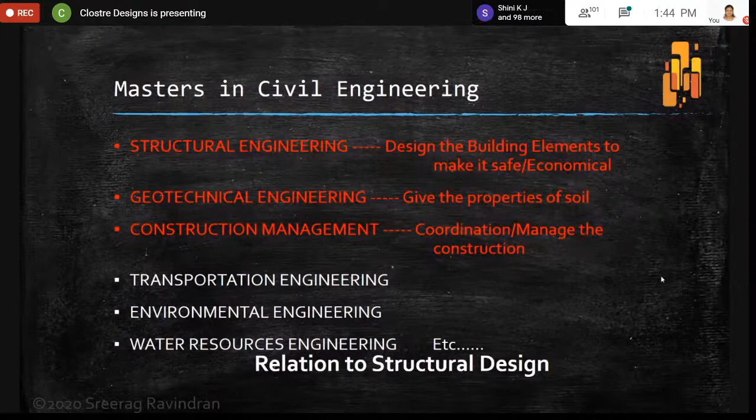Now I'll discuss a typical construction sequence. Firstly, a client will be there with a small requirement, maybe constructing a building or residence. 10 years before, this client used to go directly to the contractor and tell his requirements: I need a building like this, or I need a house like this. The contractor himself would make the plan, architectural plan, structural drawings, everything, and he alone would execute it at the site. This was the scenario happening, but now this has changed a little bit.

Now the scenario is changed like this. I think 50% is like this: client will directly go to consultants. Consultants include architect, MEP engineers, structural engineers, and many other engineers. Construction management teams will also be there.

So the client will tell his requirements to the architect. The architect will study what inputs he can get from the client and what the requirement is, then prepare a preliminary plan in order to satisfy the client's requirement.

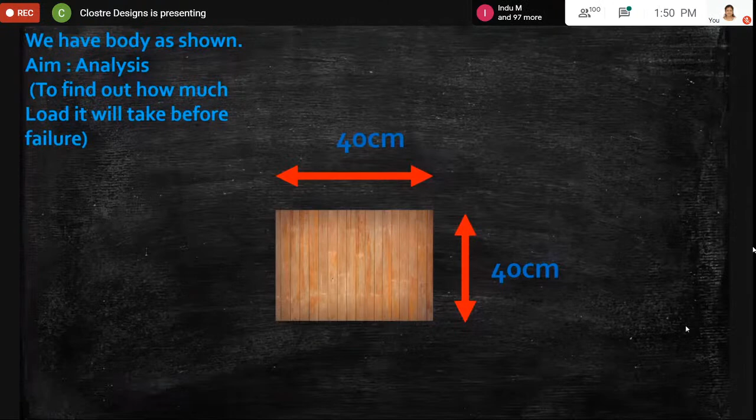Now we have a body with a width of 40 centimeters and depth of 40 centimeters. For the time being, I am not considering the length, as I'm just considering 2D for this explanation.

So we are giving the loading gradually—we will be loading all objects gradually only. We are increasing the load, and you can see at 5 kilonewton the body fails. That means the body has a capacity of taking 5 kilonewton load. So that is what analysis is: we find out how much load it can take without failure.

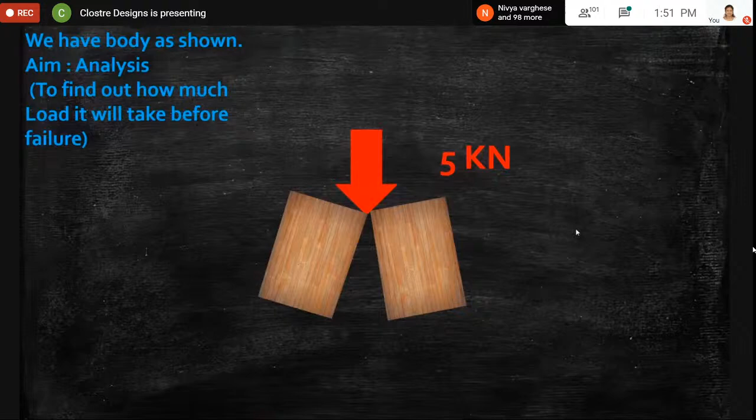So this body has a result of capacity of 5 kilonewton. Now we will discuss design. What is the difference between design and analysis?

We have a load of 10 kilonewton. Previously we had a body only, started loading, and found out how much load it could take. Now what we are doing is, we have a load of 10 kilonewton and we need to design a body to take the given load. We have certain calculations, and we found that, as per the calculation, a 40 by 80 body is suitable to take a 10 kilonewton load.

Now what will happen? We'll try giving the loading. See, we started increasing the load. Now it is safe. So we gave a load up to 10 kilonewton and we saw that the body is safe and stable. That means it was designed to take 10 kilonewton. It is not breaking at 10 kilonewton, right?

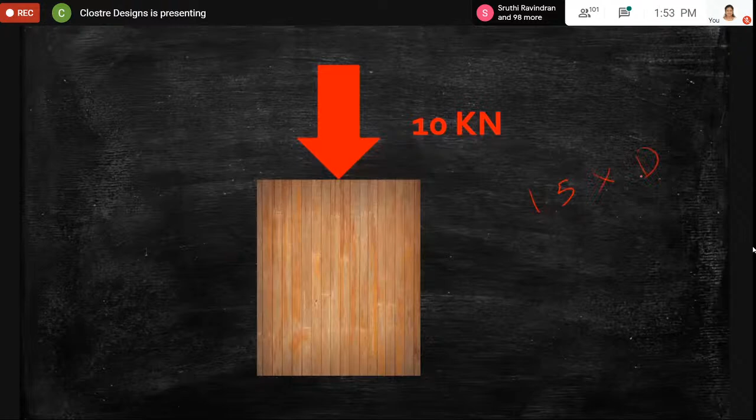Because we will be having a factor of safety, maybe 1.5 into load, or maybe it depends upon the codes, we will be having a factor of safety.

Now, further, we are increasing the load. So we increase the load and found out that at 12 kilonewton, the body breaks. That means the body can only take 10 kilonewton safely. That is what we can understand from this experiment. So the body was designed for 10 kilonewton, but still it broke at 12 kilonewton. That means there was a factor of safety, that is 12 divided by 10. So that was the factor of safety considered by the designer.

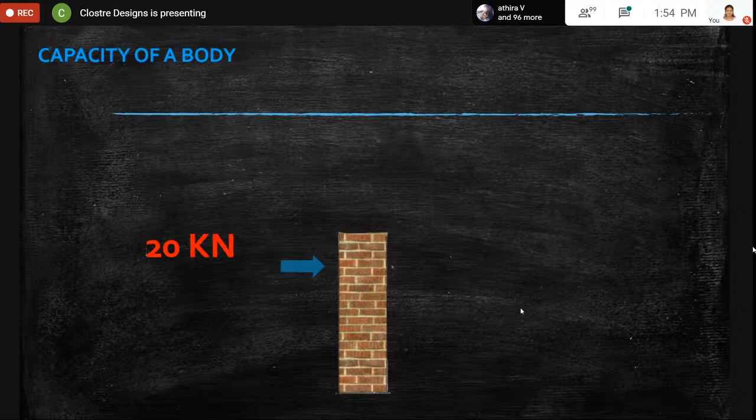Now, again, I have a wall here. This wall, I started loading gradually. So when it reaches a certain limit, it should break, right? So at 20 kilonewton, the wall collapsed. Wall failed. That means the ultimate capacity of the wall was 20 kilonewton. Beyond that, it will not take.

Now, what is this capacity and the action and all? See, whenever we are having a force or action, there will be a reaction. When we are giving a force like this, we will get back a force like this. If we are not getting back an equal and opposite reaction, the body will fail. That is the failure.

Now, when we are giving a load like this, we will be getting back a load like this. So gradually, what happens is, when we increase the load, this load also will increase. So when it reaches a point where this is not increasing accordingly, the body will break. This is known as, actually this is just Newton's third law. For every action there is an equal and opposite reaction.

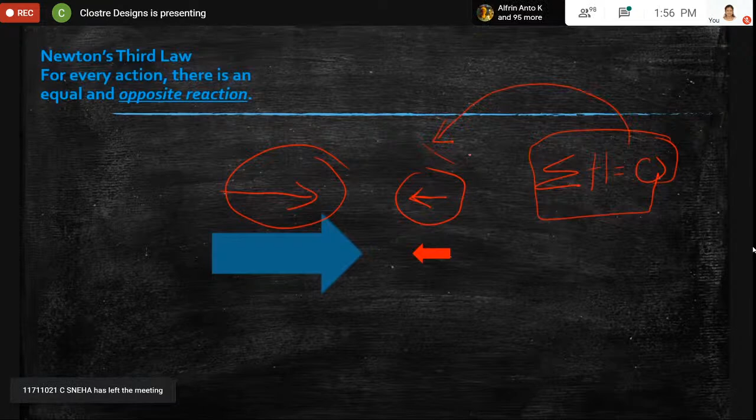So that is known as equilibrium. Now, if on the left side we have a loading and it is increasing, but we are not getting an equal and opposite reaction, that means it is not in equilibrium. So this is less and this is more. We have already studied sigma h equal to 0 as our equilibrium equation. So this equation is not applicable here. See, actually it is not 0. So we are getting an external force, but this is not in equilibrium.

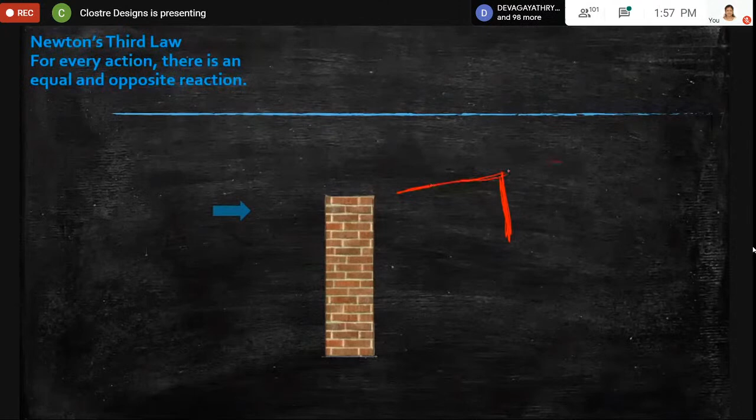So this is what we are doing as a structural engineer, to balance a force. We will be having many complicated buildings, having maybe one column and one cantilever without a counter. So maybe we need to add additional load upon that to overcome the load here, to make it in equilibrium. This is a simple thing, but this is what we are using in the design. Any software or anything, the same is used.

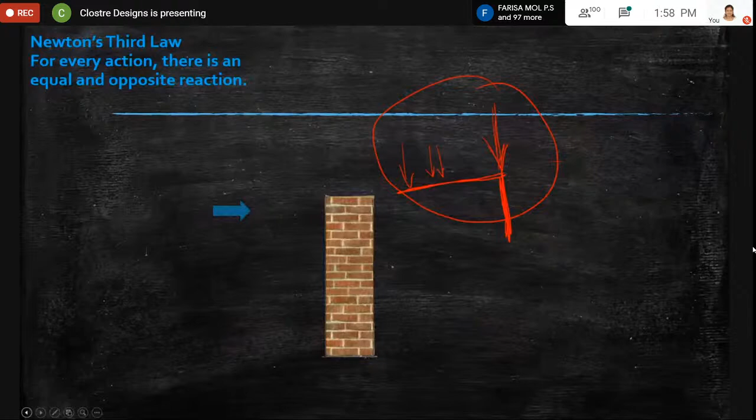Now, see, for the same example, while we give 10 kilonewton, we are getting back 10. See, when we are giving 30, we are getting 30. So it happens that, actually this will not be seen by us, but this is an internal reaction which the wall gives back while we apply a force.

But when it reaches the capacity of the wall, actually we found out the capacity was 100 kilonewton. We already found out in the previous demonstration. So when it reaches 100 kilonewton, further the wall cannot give a reaction back. So this becomes 110 and this remains 100. That is why the failure occurs. This is the simple thing which you must understand in order to design a building. Not only building, even in any branch, mechanical also, when we are designing machines, the same thing will be considered.

This was the failure reason. We had a load of 110 kilonewton, and that is greater than 100 kilonewton, so it failed. This is the same scenario, but this is not actually in equilibrium.

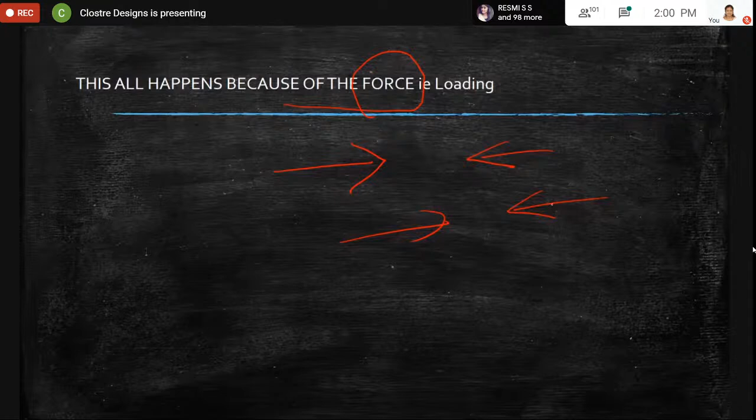Now, this all happens because force is there, right? Whenever we are getting a force, we will be getting a reaction. So there is an action and a reaction.

Force means what? Usually in buildings, force means loading. Let's simply consider one beam. One person is standing here, so the body weight of this person will be acting on the beam. This is the force and this is the loading.

Now we'll discuss all the types of forces and loading. See, we have a body here. This is an unloaded body, having no external force. If there is no external force, there will not be a reaction.

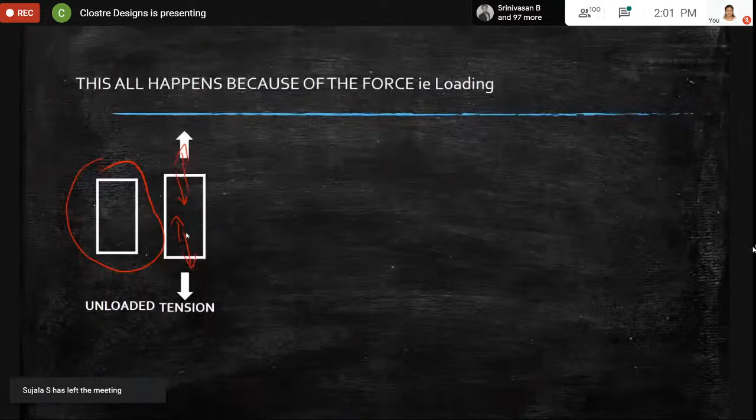Now another body, we are applying a tension on it. While we apply tension, the body will have a compression inside. That is why, in order to make it in equilibrium, an opposite reaction will be there. So in this scenario, this is tension force.

Whenever we are stretching something, that is known as tension. The terms I am using are very important in design. Now, what is compression? Compression means whenever we are compressing a material or an object. These two terms are very important: tension and compression.

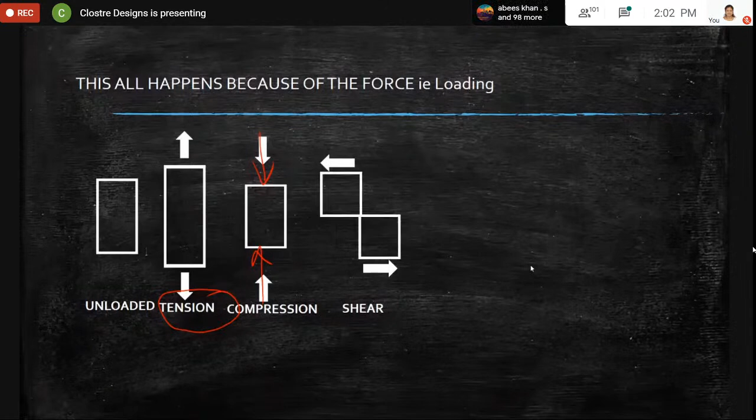Now about shear. Shear means, as you can see in this graphic, sliding - this is shear. I'll explain this once more with another video. Now this is bending. Bending means whenever a body is bending, like this.

Now, what is torsion? This is actually when one force is acting like this and another is acting like this. So this will create a torsion effect in the body.

Now, why do we study this much loading? See, when we get a tension load, what must we do? After getting a tension load, we must design a body to take this much tension load. If we are getting a 10 kilonewton tension, we must design the body to take maybe 10 into 1.5, that is factor of safety.

So we will design the body accordingly, and that body will take that tension. Now, what about compression? Same thing - if we have a 10 kilonewton compression, we multiply by factor of safety and design that load to get a material or object to withstand that compression. Same for shear, bending, and torsion.

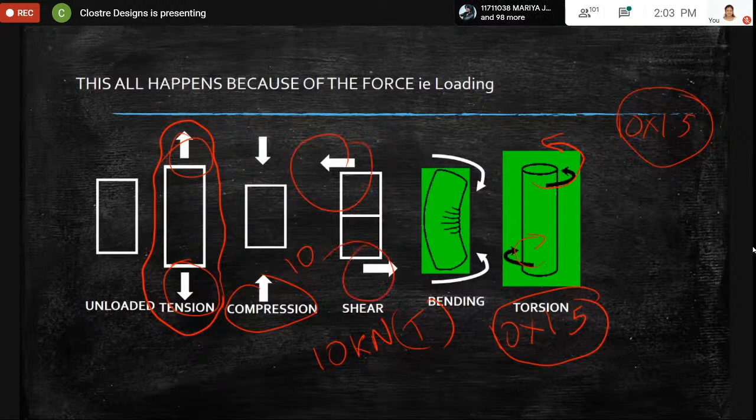Now, it is difficult to get a body with only tension force. There are such bodies, but still it's very difficult - it was very rare to get a body with only tension or only compression. There will be a combined effect - tension, compression, shear, bending, torsion will all be there. So actually all these loads together will be affecting the body.

This will be a combined effect, so we need to design for this combined effect. That body must be designed for tension, compression, shear, bending, torsion, etc. Whatever loading it is having, we need to design for that.

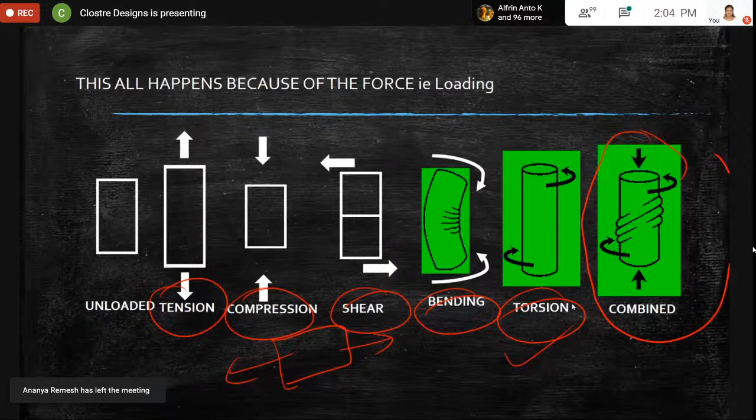That is why for a beam design, maybe you will be doing beam designs in third year or fourth year. While doing any column design, beam design, or retaining wall design, we will be checking for each case - shear, compression, tension, torsion, like that. So this is the scenario and this is the basics of design.

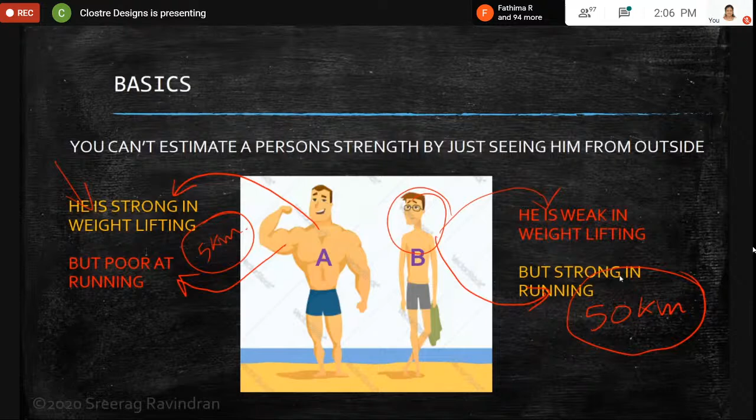without resting. So what we must understand is we must relate this to our structural design. Here we can understand that all bodies will be different and unique, all materials will be different and unique. So some bodies will take some type of loading more, and some type of loading less.

As we already discussed, we have tension, compression, shear, torsion, etc. So for these loadings, A can take only compression, or B can only take tension - that can happen. Every material or object is not the same. That is what I wanted to tell you, and now let's see how it relates to our structural engineering.

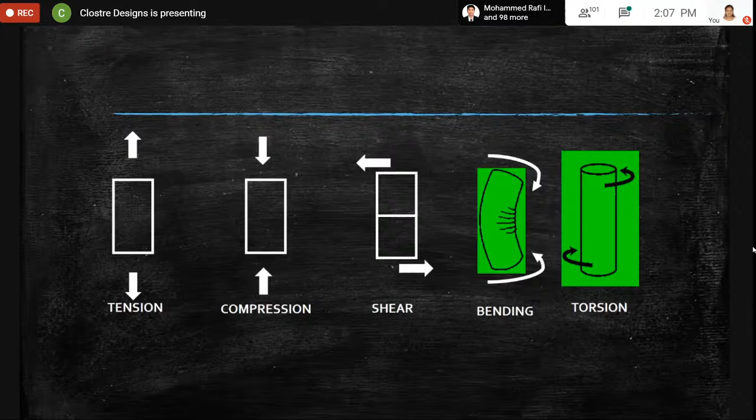See, we already discussed, we have tension, compression, shear, bending, torsion. So some bodies will be taking tension more. It can take maybe up to 100 kilonewton tension. But same 100 kilonewton, if you give compression, it will fail.

So the same body will be taking shear more and not bending, and it may be taking torsion more. So this purely depends upon the material. Now I will show you one example of this type of loading so you will understand more. Some materials are there, maybe it will take a less amount of tension and high amount of compression and all. I will discuss with you later in a later slide.

See, some objects will take all the loads. Now these two forces are most important for you: tension and compression. What is tension and compression? This diagram should be in your mind when you study or do analysis. Tension and compression.

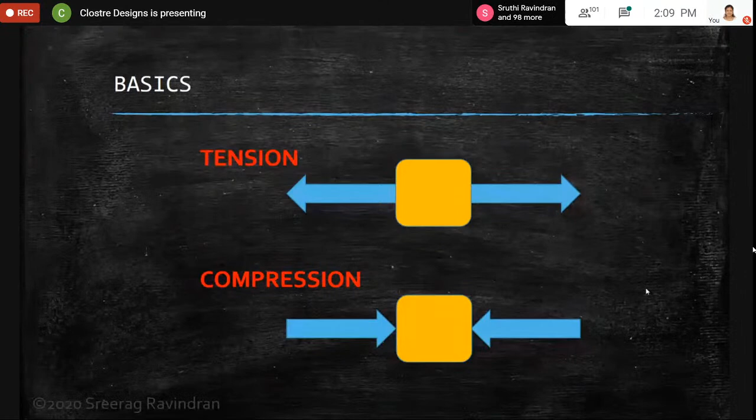See, in olden days, you can see mud houses. Before 20 years, mud houses were very common. 20-30 years ago. Now it was replaced, and now it is obsolete. So previously, this mud structure was there, right?

Mud is a material, but mud has some problems, some weakness. Mud will take compression more. If I have a mud block and I give compression, it will take it. But if I give tension, mud will break.

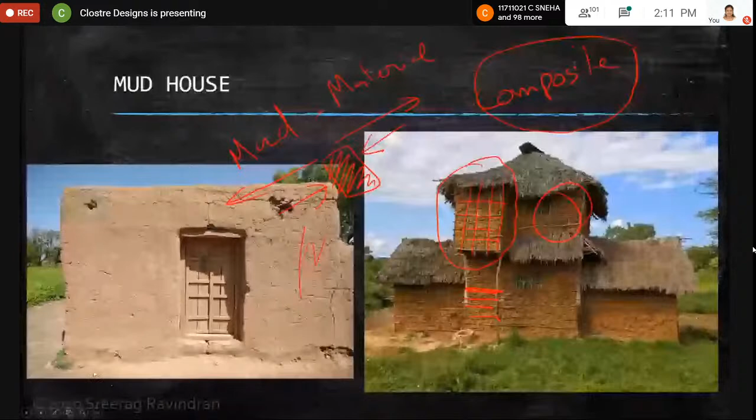Now, see, I told you mud is weak in tension. You will be thinking why it is weak in tension. You may not have observed. See, if we have a mud block like this, you can see if we stand here, what will happen? This will break, right? This will be happening like this. That is why landsliding occurs. Nowadays you are familiar with landsliding because for the last 2-3 years we are hearing about this landsliding. Why? Because, see, you see this one.

You can see this one. When there is tension, this is a tension force. When we are having a tension force, the mud fails. That is why we are getting that mud is breaking. I hope you understood this. So this is the scenario in the mud. So I think now you understood why mud is weak in tension.

See, whenever you are seeing some object, you can observe that object and analyze it in your mind. So that will be clear for you. That is why we use a combined form, that is bamboo plus mud. Some people may ask, why can't you use bamboo only? You can, no issues, but some other problems will be there, acoustic problems and all. So that must be covered along with the soil.

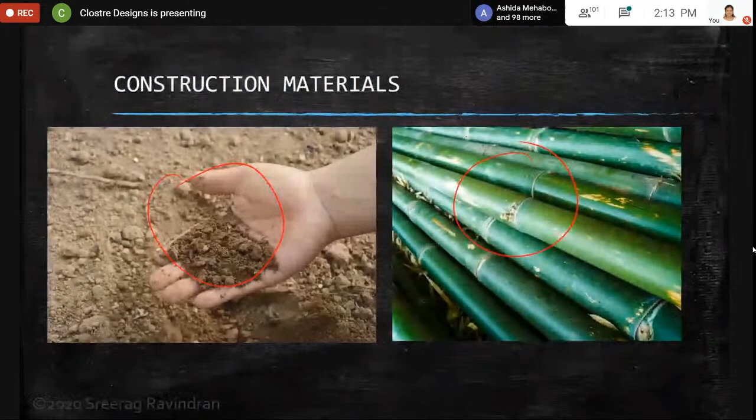Now, why is this related to our construction industry? See, construction materials previously were mud and bamboo. This was the major construction material used before 20 years. Now, as I already discussed, mud will take compression more, bamboo will take tension more. See, now it is replaced.

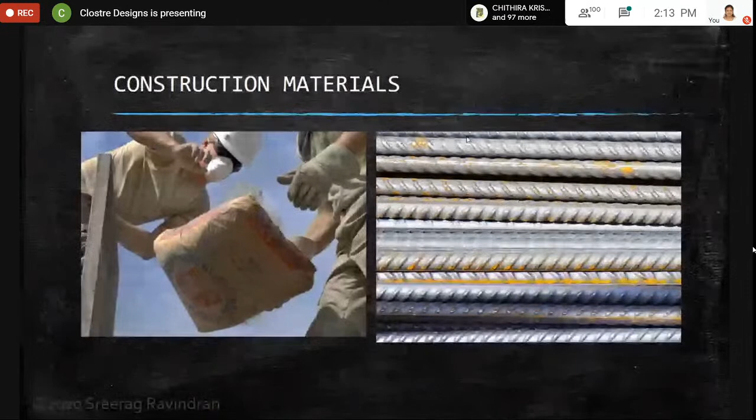Now mud is replaced with concrete, RCC, and steel - our bamboo is replaced with steel rebars. So this compression and tension works the same. For concrete, you all know it will take more compression, and steel, it will take more tension.

Everybody will be having a confusion. Whenever we say concrete is good at compression and steel is good at tension, that means concrete is weak in tension, right? Concrete cannot take that much tension. We are neglecting the tension force, which can be tension capacity. While you are designing, you will be checking this tension, but you will neglect it.

But steel will take tension more, and people will answer compression it will take less. No, steel will take both loads. That is why you can see steel structures, buildings only with steel, I-section, I-beams and all. But you can't see a building only with concrete without reinforcement, because tension will be difficult to attain.

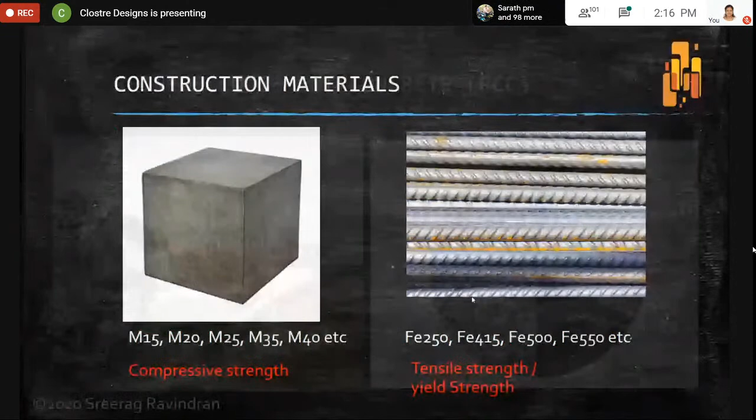Now what is RCC? Don't mistake, it is not reinforced concrete cement, it is reinforced cement concrete. What is RCC? It is a mixture. Coarse aggregate will be the important mixture, more in this mix. And again we will be adding fine aggregate, then cement, then water, then if needed only, admixtures.

So while going to site, you may see people telling what type of mix, okay M20. M20 means 1:1.5:3. So what this means? 1 means cement, 1.5 means fine aggregate, and 3 means coarse aggregate. This is the ratio, and this purely depends upon the design mix.

So we have actually site mix also will be there. Maybe the aggregates available in different sites will be different. So the best practice is, whenever you are doing construction, just make a cube having IS specification 150x150x150 and break it at 28 days and confirm the loading, that is M20 or M25, whatever is mentioned in the structural drawings. If you are going for a QC engineer and all, you must know this type of things.

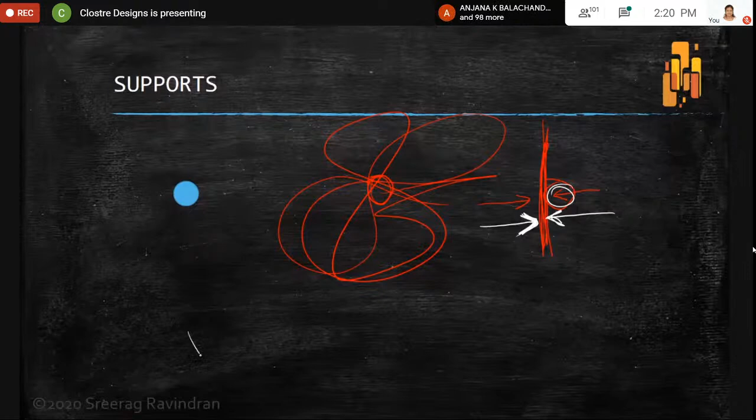I'll show you in a different color, that will be fine. Whenever we are getting a force like this, that means the body will try to move, right? So we will be getting back a reaction. So wherever we are restricting, this point must be very clear for you: wherever we are restricting, reaction will be there. Action and reaction will be there. If there is no restriction, no reaction will be there.

For this particular body, no reactions are there because it is free to move. Nobody is forcing it to stop. It is free. I am ignoring friction for the time being.

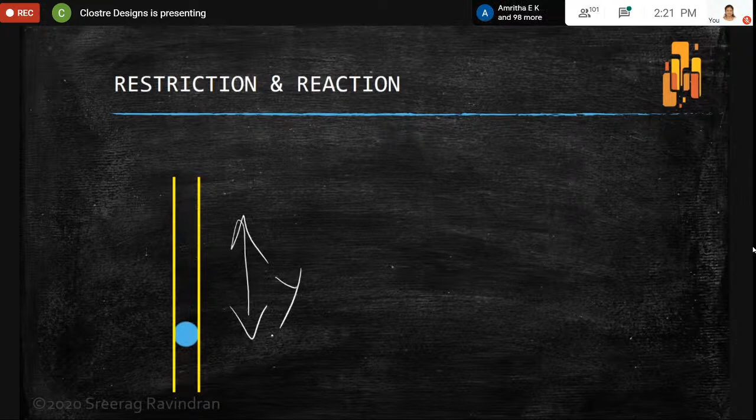Now the same body I am taking in one tube. What happens? It can move only in the Y direction, right? So in this one, it can only move in the Y direction. So where will the reaction be? Which direction will the reaction be? Obviously it will be here, right? Because the body will try to go outside, but the wall is giving like this, and the body will try to go outside, and gives like this. So we are getting a reaction like this. The direction of the reaction is very, very important.

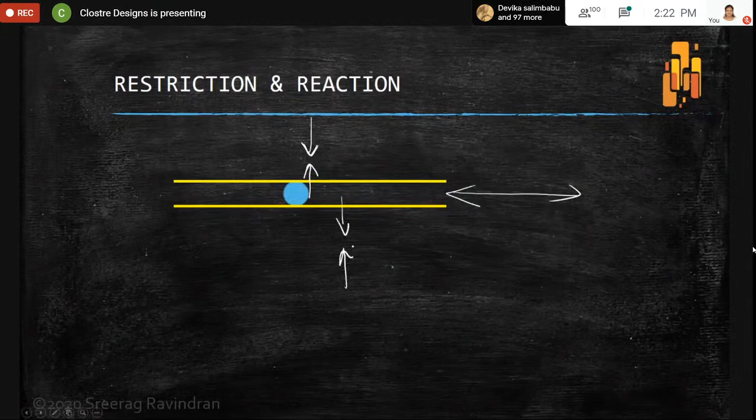So another body, we are having an X direction movement. Where will be the reaction? Which direction will be the reaction? This direction, nobody is restricting, so no reaction will be there. But when the body tries to go outside, the wall will push like this, so that is a reaction. And again, here also, one reaction will be there. So graphically we can show like this. So this is what reaction is.

Now, what happens when a body is in a box? It can't move anywhere, right? So we will be getting reaction all around. The body will try to move, but this will be fixed.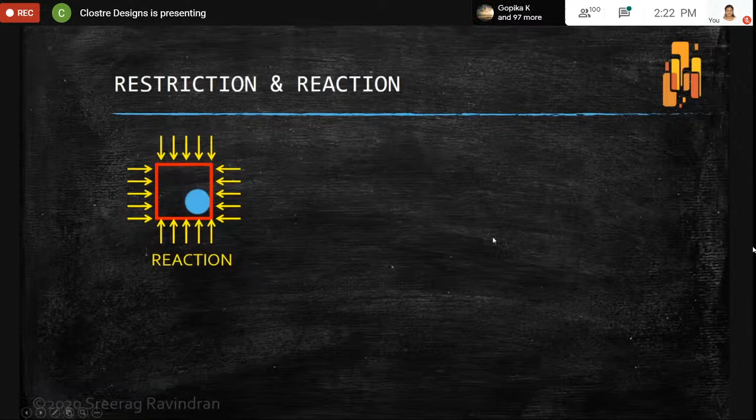Now, same thing, I am just considering a ball or something like this. Now, this one can move in what all directions? It can rotate clockwise and anti-clockwise. And it can move in X direction, and it can move in Y direction. So this is the three possible movements in an XY plane. I am not considering 3D for the time being because it may lead to confusion, so for the time being I am taking 2D. So we have X, Y, and rotation. These are the three movements or free movements of a body.

Now we will discuss what is roller support. I am covering your topics one by one, roller support also. While you are studying, you will find it is actually familiar. This roller support is familiar. What is roller support? I am considering three rollers here.

What happens? We will see by giving a load. When I am giving an X direction load or force, anything, it will move, right? Nobody is restricting the movement, it is free to move. So that means we are not getting a reaction in this direction. It is free to move. Now, X direction is allowed.

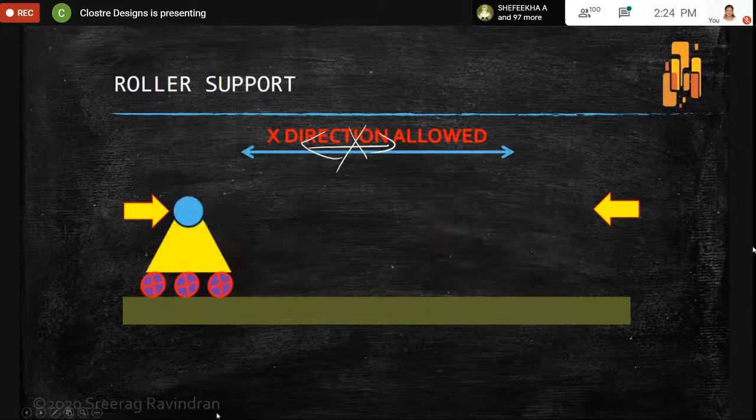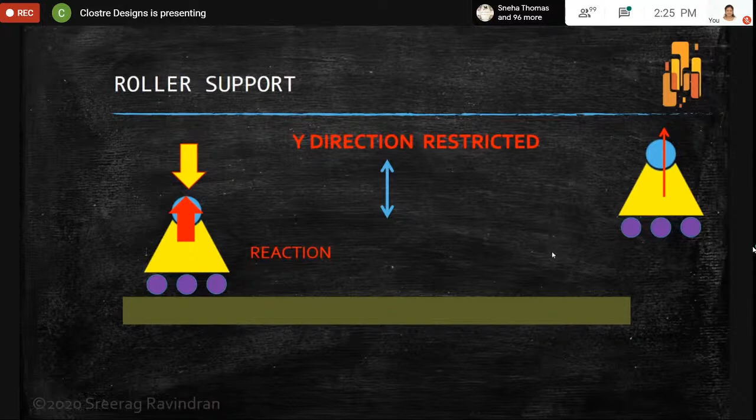What about Y direction? When we have a Y direction force, the body can't go outside because it is restricted. One wall is there, right? So we will be having a reaction. So as we previously shown, X direction is okay, fine, Y direction is not possible, reactions are there. Now, Y direction restricted. So this is it, and what about rotation? Rotation is possible, it can rotate like this. So rotation also possible, so only restricted thing was Y direction.

So we will be getting a reaction on the Y direction, rotation allowed. See, what is the example for this roller support? Have you ever thought about that? Whenever you are studying something, you must consider or check the examples, whenever you are seeing something you must give an example with your familiar cases. See, for this one, have you seen a bus?

This bus can be an example for roller support, right? When I am giving a force like this, whether the bus will go down - if the soil is bad, the bus will go down, I am sure. But if it is on a road, a hard surface road, it will not go down. But if we push like this, and if it is in neutral, only then it will move, right? It must be in neutral and without a brake, then it will move. That means it is an example for roller support, right? So that is a common example which you can see everywhere for the roller support.

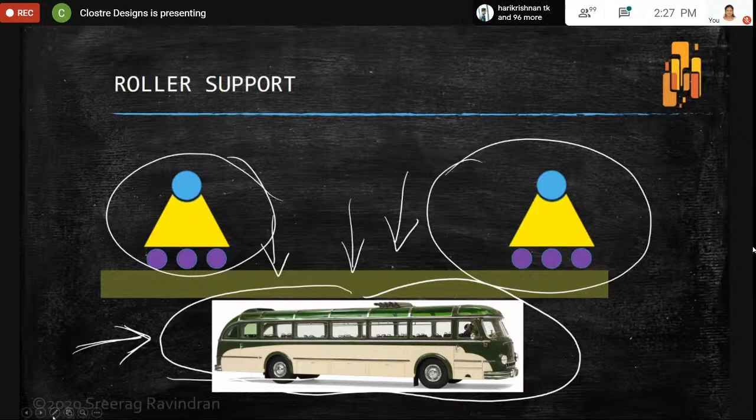Now, see, we need to check what example is there in our structural department, right? Structural engineering - have you ever seen any example for this one in any case? Yes sir, where? In the case of bridges. Very good, very good, very good. See, in case of bridges, roller supports are there.

You can see the image here. Roller supports are commonly located at one end. Please be noted, it will be in one end only. This allows the bridge structure to expand and contract with temperature changes. The expansion forces could fracture the support at the bank if the bridge is locked. See, some small movements will be there, some delta - if you are studying structural engineering, it will be familiar, delta. So some small deformation, some small deflection will be there. That deformation is allowed, maybe it's small, maybe 10 mm or 15 mm. That is allowed. If that is not allowed, or we restricted that, it will cause problems for the bridge.

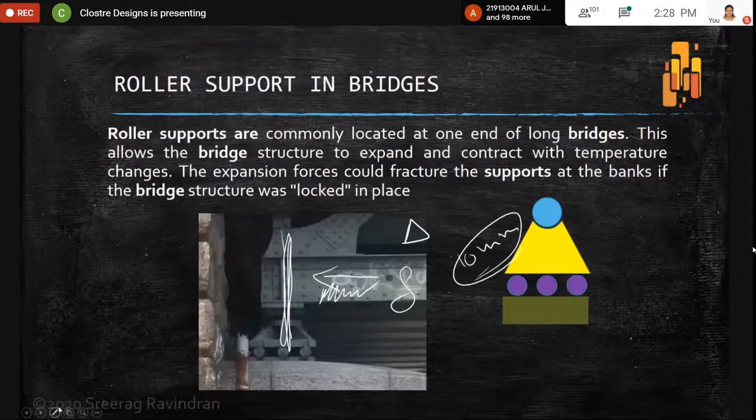It will cause cracking. That is why we used to give roller support in one end. Now, after this session, check your old mechanics textbook. Anywhere you check, you can see this type of problem.

One place it is hinged support and one place it is roller support. While I was studying, I was confused why everywhere it is like this, and teachers are not discussing this, because in first year we are not aware of this much. That is why they are not discussing it. Anywhere in the mechanics textbook you can't see a beam like this, because if it is like this, it is difficult to solve. So you will be seeing like this.

Whenever you are finding out a bending moment for a simply supported beam, the beam will have a roller support in one end. That is the condition. Now what about pinned support? I think roller support is clear for everybody. Pinned support is very simple. We are just avoiding the rollers and resting the pinned support on the beam. Now can we do a similar experiment?

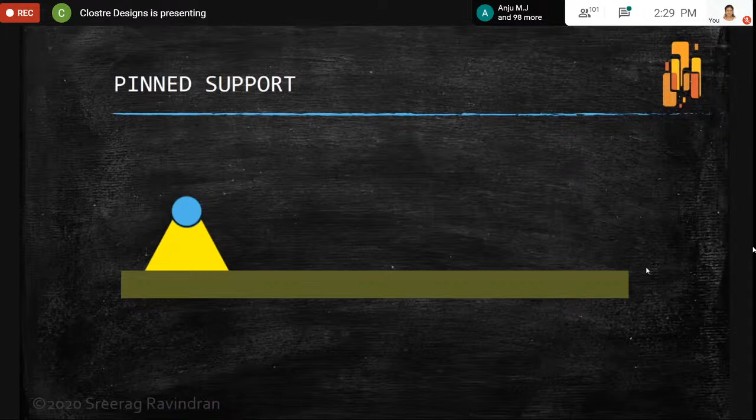We are giving a load in the X direction. Can it move? No, sir. So whether reaction is there or not? Reaction will be there, sir. Why? Because it is restricted. So reaction will be there.

Previously in the roller support, we were not having restriction in the X direction, so we were not getting a reaction. Now the scenario is different. That is the main difference between roller support and pinned support. That is very simple now.

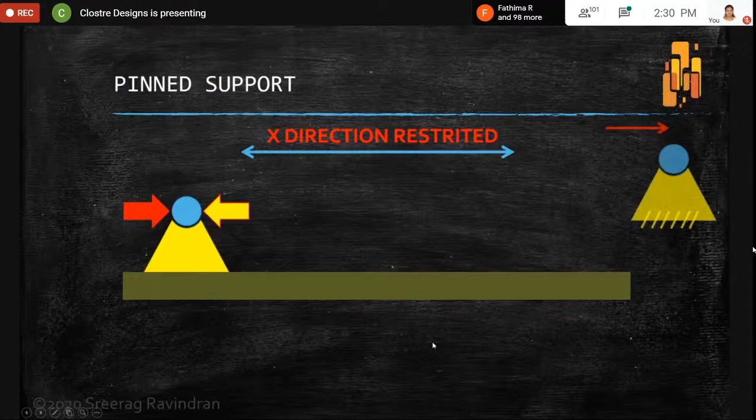So there is a reaction. X direction is restricted, so this is the pinned support. What about Y? Will we be getting a reaction? Reaction will be there. Previously for a roller support also, the same reaction was there. This is what you studied in mechanics, and if you go through it after my session it will be more clear, I hope.

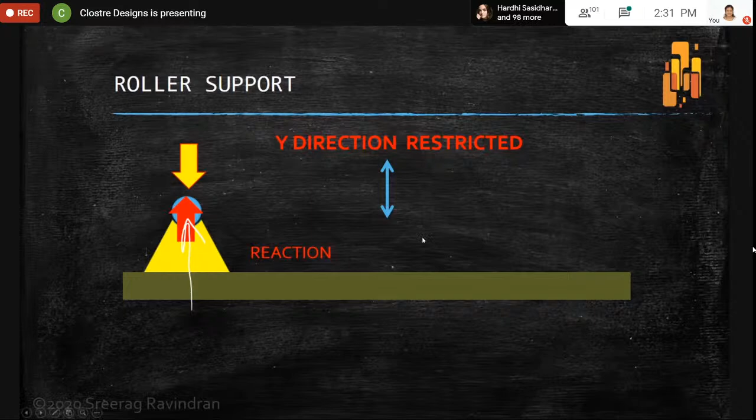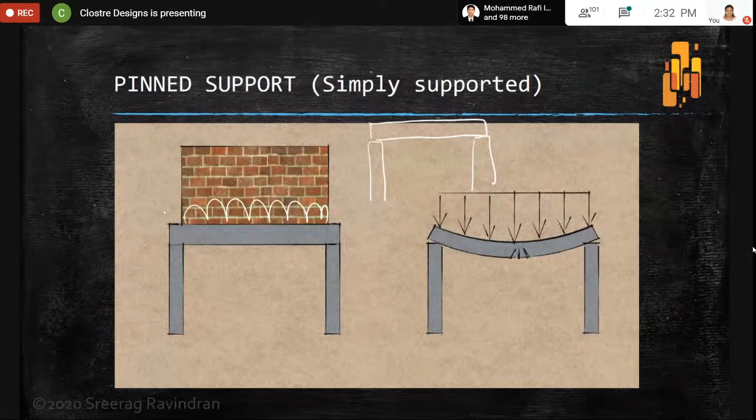Now what is a pinned support in the original case? Whenever we have a beam and we place one beam simply like this, that is why it is known as simply supported. Simply we are placing it. So we are having a load and the beam will deflect like this. You can see here, and cracks are formed here. Here you can see a small delta. So this is what happens in a simply supported beam.

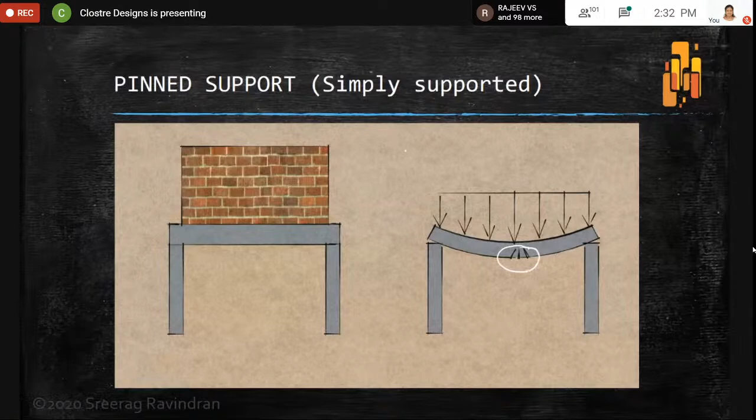Now one more thing I need to explain. Why are cracks here? Whenever we take concrete, that is RCC, reinforced cement concrete, we add steel together. We already discussed that in the first 2-3 slides. We add steel together with RCC, not plain cement concrete, so we get a composite material. If you take a beam cross section, we will get a reinforcement like this.

As per IS code, yes, you are correct. As per IS code, minimum 2 bars must be provided at the top also, no issues. Now why are we providing here? Because if we consider a beam, we will be having a neutral axis. We have compression and tension, that is the main thing. Tension will be here and compression will be somewhere here. It purely depends upon the loading.

If I am getting a loading here, it will be different, so don't memorize it, just consider as per your case. So this tension and compression - wherever compression is there, we need concrete, and wherever tension is there, we need steel. In the tension face, concrete will have a small crack. For sure cracking will be there. That is known as cracked concrete. You may be hearing the term cracked concrete.

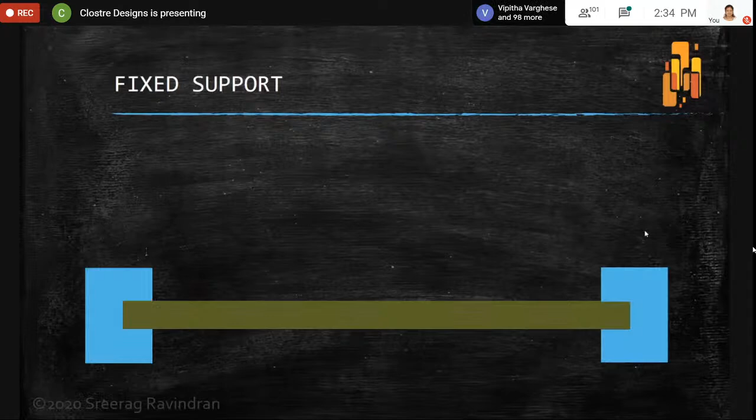What is fixed support? Fixed support means whenever we have a beam like this and we are just fixing it, nothing is allowed. No horizontal movements, no vertical movements, no rotation, nothing is allowed. That type of support is known as fixed support.

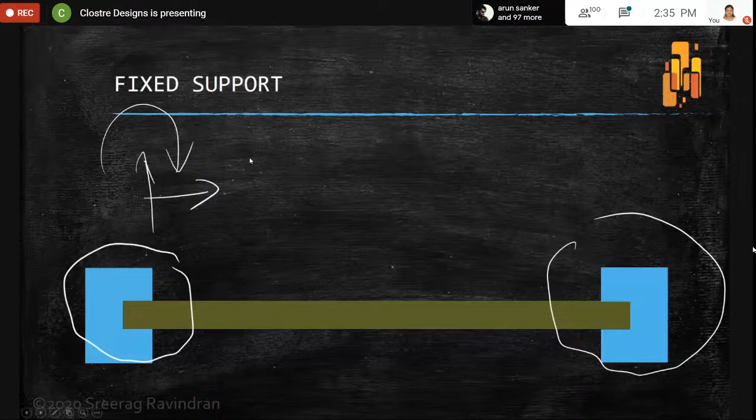These are the three main supports in structural engineering. If you know these supports, it will be very helpful for your preparation for GATE or design, and it will help you solve complicated problems. So these are the indications.

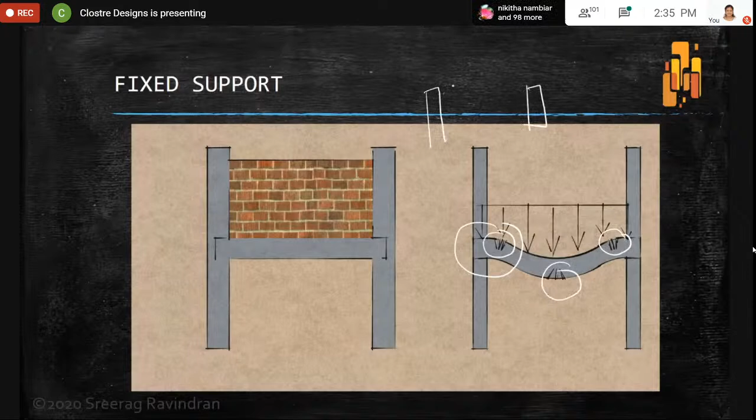You can see the difference between our simply supported and this one. See, cracks are here too, right? Previously, the crack was not here. Previously, if we had a beam, our beam was like this, this gap was there. But here, no gap is there.

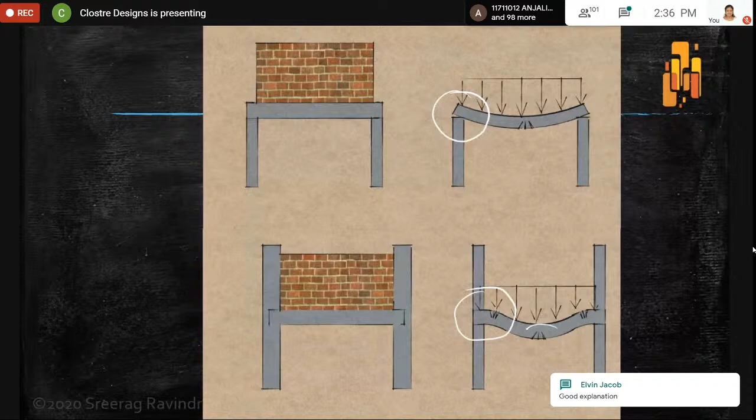So this is what a fixed support is like. See the difference. This is very important for you. Just see wherever I circled, the crack formation. And what is this one, a fixed support or simply supported? Anybody?

Top side, what is this one? Simply supported, sir. Very good, simply supported. And what about this one? Hinged support, huh? What about this one? Second one is fixed support. Very good, very good, okay fine.

Now we covered most of the basic things. Now we are going to the elements of structural design, elements of structural engineering. While discussing the master's degree in structural engineering, we said this deals with the design of structural elements considering safety and economical feasibility.

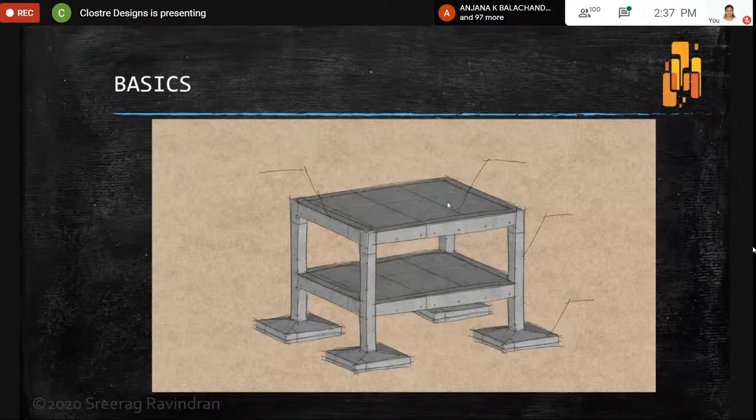Correct? So this one is slab. What are the elements? These are the basic elements of structural design: slab, and what about this one, column, and what about this one, foundation. This one is beam. Some other things will be there too, like retaining wall, but still for this type of building, these four are the elements considered.

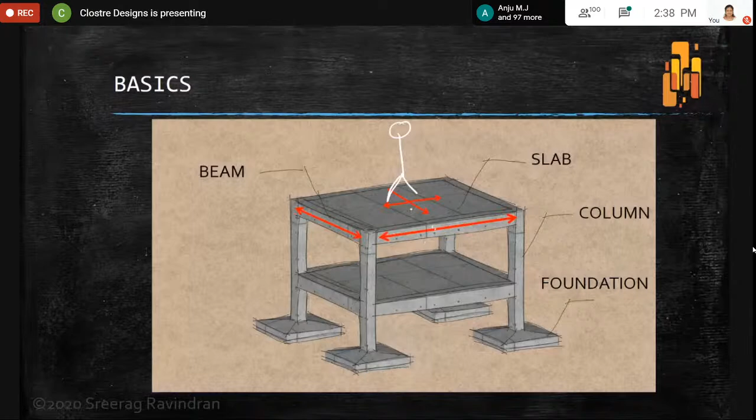Now, how does the loading occur? When one person is sitting or standing there, his load will be transferred from the slab to the beam, from the slab to the beam. And then what happens? From the beam it will go to the columns, correct? Then from the column it will go to the foundation. Then from the foundation it will go to the soil, and again soil will give back a reaction, right?

That is what we studied this much. When we are giving an action, there will be a reaction. See, this portion, soil will be giving back a reaction, and if this reaction is lesser than action, there will be a settlement and a foundation collapse. So these things about the soil, geotechnical engineers will give us a proper idea or report. I can show you some report which mentions the N value, that is SBC values for the particular site.

Now, what is shear? The best example for shear is this one, scissors, while cutting the paper. It is exceeding the shear capacity, that is why it is tearing. You can see the beam also here, the beam shear also you can see here.

Now you can see in the first one, shear failure has happened for that particular beam. First one, shear failure was there. If you are doing MTech or PhD or something, you might be observing this one. This is shear failure.

And what is bending? If we have a rubber object, see, this is bending. You can bend the object like this. And for this particular object, it is not okay with the bending. It is bending too much when we are bending it.

In this demonstration, I just want to show you how the beam bends like this.

And we discussed torsion also, right? What is torsion? See, this is torsion. You can see it in this video. So this is what torsion is.

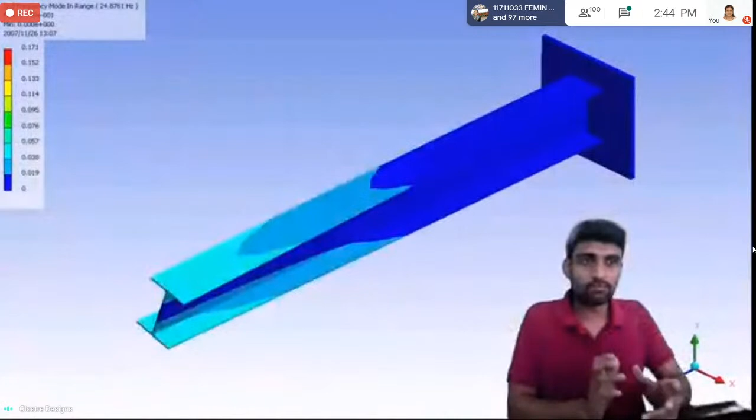And while we design an object for torsion load, we used to design it for that. And our deflection or stress, whenever we are having a load, we will be having a stress. This is a stress deformation, the stress formation in the beam for torsion.

Previously I was telling you that some objects will be having a capacity to take only tension or only compression. See, I have a thread with me, and I am just trying to pull it. So pulling means tension, right? Just remembering this one, this is compression and this is tension.

So this must be clear for you, which is compression and which is tension. Now, in this particular string or thread, when I am pulling, it is taking load. But while I am compressing, it is not at all taking the load.

So this object, see, shear also it is taking somewhat. But it is not taking tension... it is not taking compression. It is good at tension. So some materials have properties like that.

Now, in this demonstration, I'll show you one thing. While we are bending the beam, I told you that we will get a compression zone and a tension zone. See, this beam has lines upon it. Observe the lines please, you can see here the lines have stressed too much, right?

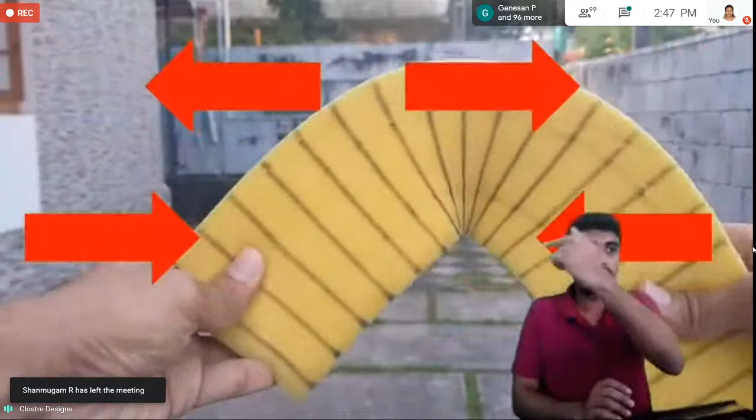Okay, now we may have a cantilever, right? Sometimes we may get a cantilever. Maybe bending will be in the opposite direction, meaning the same thing, it will be ulta, that is, compression will be down and tension will be up. So the basic principle is wherever we are getting tension, we must provide steel reinforcement because concrete is weak in tension.

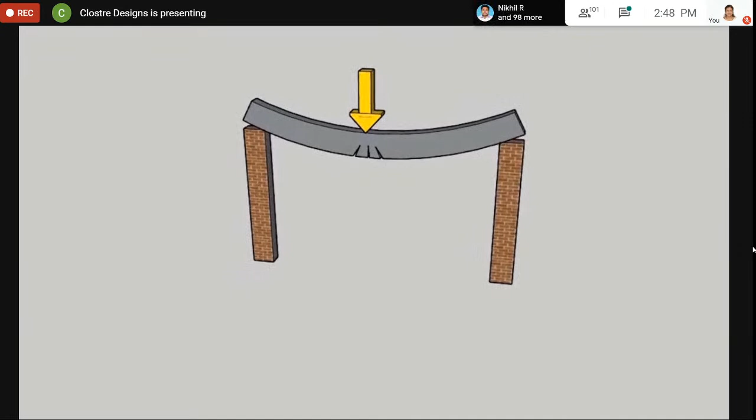Beam will deflect, see the crack formation and the deflection pattern. But this is how a slab will deflect, a simply supported slab. See the non-loaded slab and the loaded slab.

This is how a not simply supported, it is a fixed continuous beam. See the deflection pattern and the crack formation.

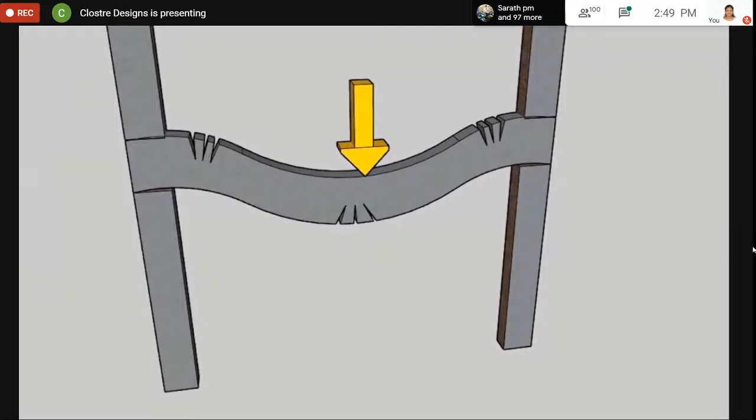We will just discuss the loads used for design: dead load, live load, wind load, and earthquake load.

So dead load means self-weight and permanent loads. It will not move, it is not a temporary load, it is a permanent load. So every object or material will be having a density rho. And we have 4 IS codes for this.

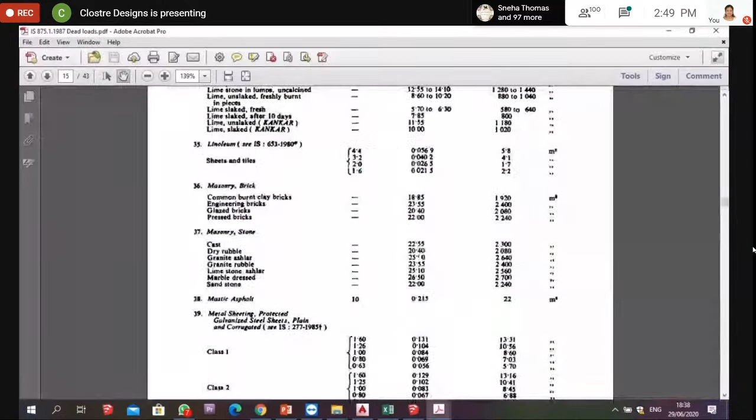One is IS 875 part 1, that is for dead loads. Here you can see all loads, it will be per meter cube. You can see lime mortar, lime plaster, common engineering bricks, glazed bricks, etc. From this you will get the raw value and you can multiply with the volume, so volume into density, we will get the load of that particular object or material. Concrete unit weight is 25 kilonewton per meter cube.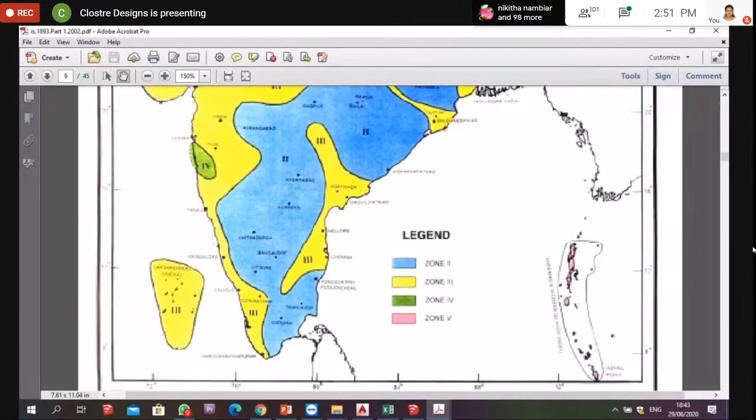Then comes the earthquake load, this will be like this. For earthquake we use IS 1893 part 1. In this also, they have categorized India in seismic zones. So we need to check in which area we are coming, in which zone we are coming. Then we will calculate accordingly.

Then we will apply that load to our model. Just we will consider one beam. In this beam, when we bend the beam, just notice where the compression and tension comes. In the top portion it is compression and bottom it is tension. So I'll show you another video to demonstrate this and to understand where we exactly provide the tension reinforcement.

We know that concrete is weak in tension and strong in compression, but steel is strong in both tension and compression. We shall see a video to understand the working principle of RCC, reinforced cement concrete. For simplification, we are taking identical materials which show similar properties of concrete and steel. In this video, C represents compression and T represents tension.

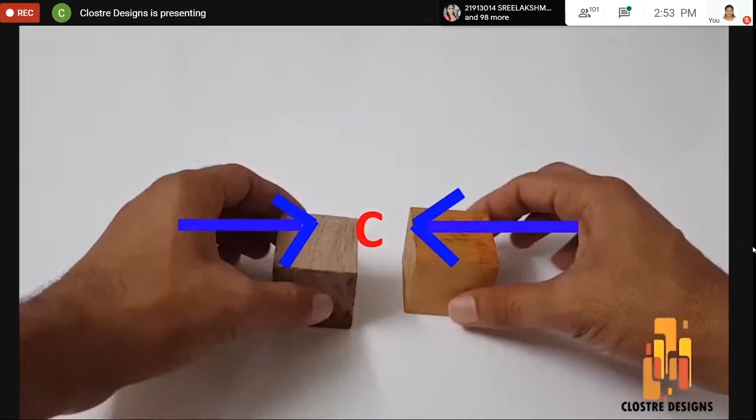Consider 2 wooden cubes. When we apply a compression force, it does not fail. But when we apply a tension force, it fails or it detaches as shown in the video. So this represents concrete with similar property.

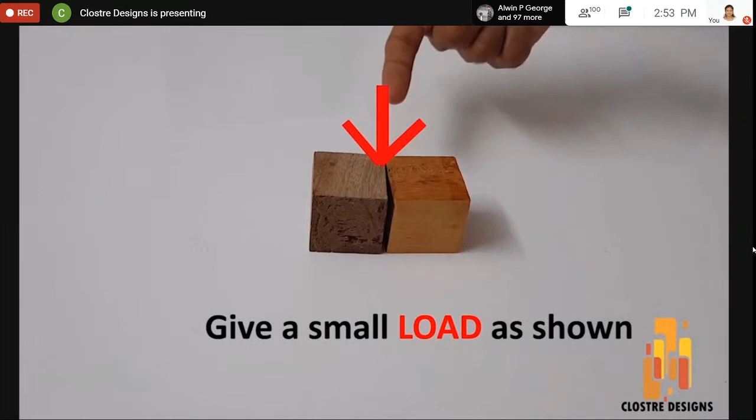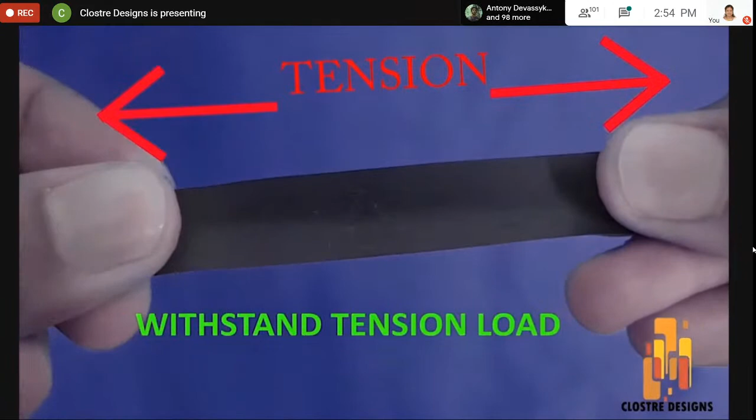Simply by giving a load, we'll make a V shape with opening on the other side of the load application. One side it will be compression and other side it will be tension. This insulation tape can withstand tension as we can see. This represents steel with similar property.

By joining these two, we will get a material which can withstand both tension and compression. We need to know where exactly to provide steel. While trying steel at the top, there is no material to withstand tension in the bottom, hence it fails. Providing steel at the tension face will make the material withstand tension and compression.

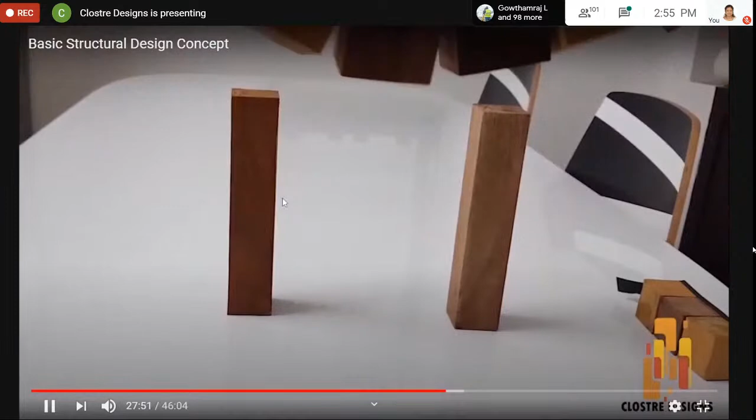Consider two columns. When we try to keep a beam with reinforcement at the top, it fails when the load is on top. The same beam will be stable when we provide reinforcement in the tension face.

When we have a cantilever, our tension face will be at the top, so we need to provide reinforcement at the top of the cantilever.

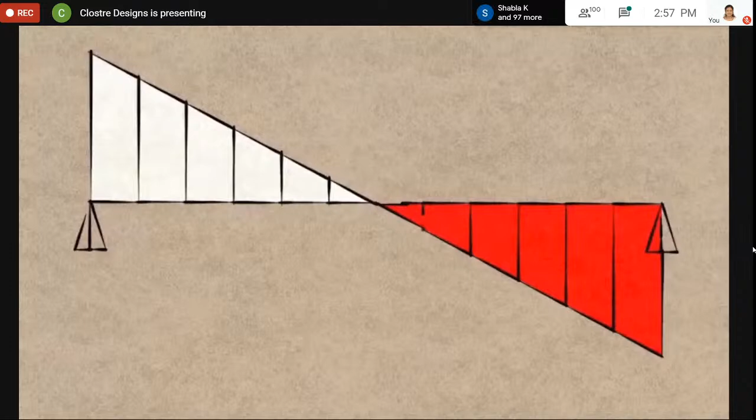We will check with an example. Just consider a 4 meter beam having 10 kilonewton per meter load. We know the bending moment will be WL square by 8, and 10 into 4 square by 8, so it will be the bending moment at the center. And shear force W into L by 2, and it will be 20 kilonewton on both sides. Now we will model the same beam in ETABS, 4 meter.

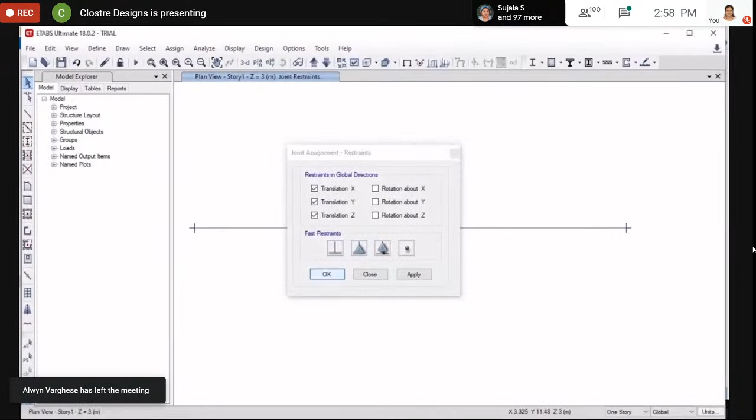We will assign the supports to pinned because it is a simply supported beam. Then we will give a loading of 10 kilonewton per meter as live load. After this, we will analyze.

So we will check the reactions first. We are getting 20-20, which is W into L by 2. This is the bending moment. And we will check the shear force. It is also 20, so that means the manual calculation is matching.

Now what we will do is try to design it. We will assign the beam as beam 20-20, that is 20 centimeter depth and 20 centimeter width. We will try to find out the reinforcement required.

For the time being, we are ignoring the dead load. We are just taking the live load. So using these values, moments and shear, we'll be designing it.

So we got the reinforcement. You can see at the middle, we are getting 392, and at the supports we are not getting negative moments because it is simply supported. This is the report.

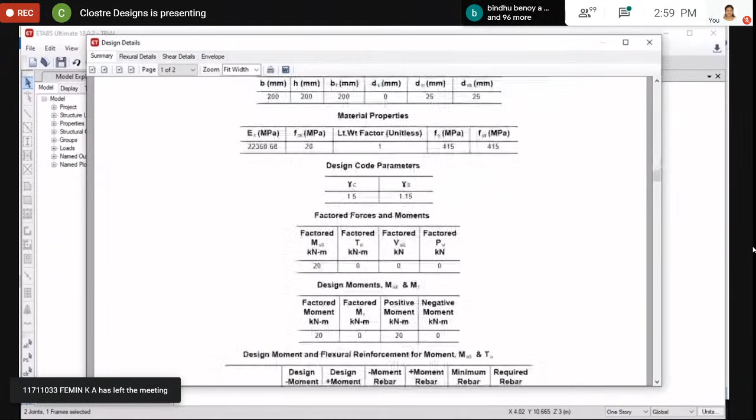And this is the shear values and all.

Quickly, we'll try to model one building, a G+20 building. We have drawn the grids, and we'll try to draw the columns.

Then I'll draw the beams. I have defined the beams and columns and slabs also.

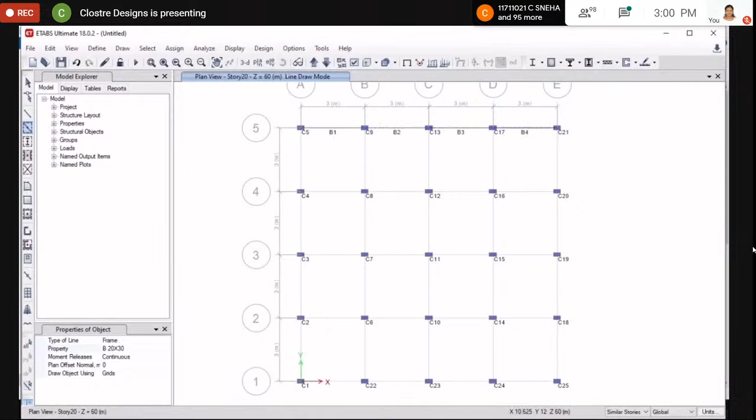So I'll connect the beams to get the ties. Then I'll take the slabs and draw them. The slab thickness I have considered is 12 centimeters.

So this is the building. Now we will start loading. Mainly we'll be having two types of loading now: one is the live load for the slabs and dead load for the slabs, then wall load on the beams.

We're not giving earthquake, seismic, or wind load for the time being. ETABS will automatically take the load combinations, 1.5 dead load plus 1.5 live load, as per IS codes.

Now, that was the design for small buildings. I hope we actually exceeded 3 o'clock. One second.

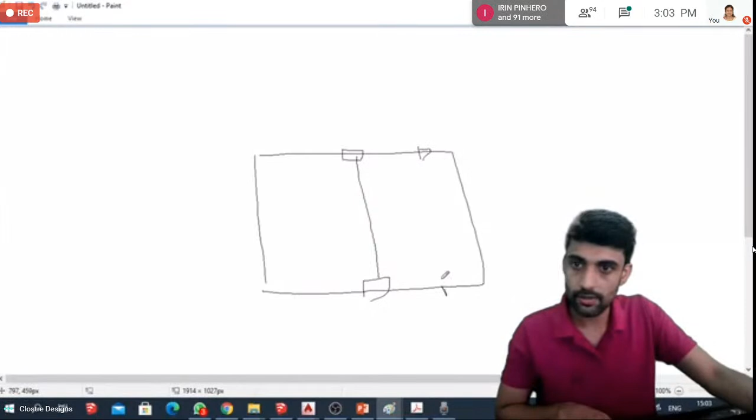When we have a building like this, his question was: we have a column here, and we have a beam here, and we have a column here, and here we have a beam, and this beam is a secondary beam.

Now, this support actually will be like a simple support because the main beam will have a torsion release. In ETABS also, we have some release options. So we can do the release and analyze it as simply supported. No issues.

Hello, is it clear? We can make it simply supported, no issues. Small partial fixity though, some fixity will be there.